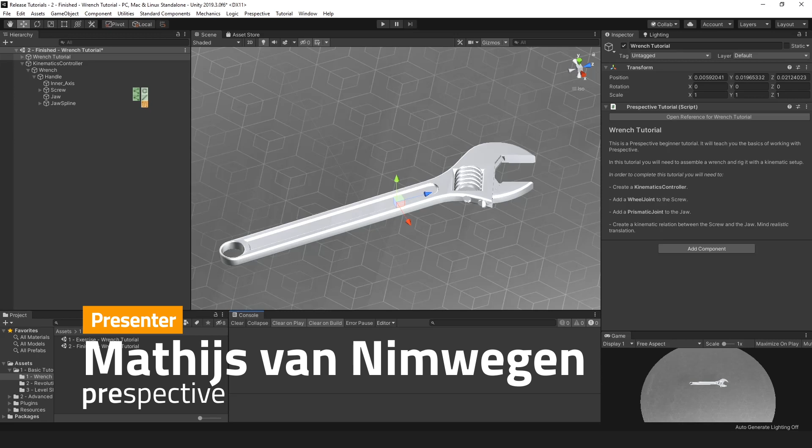I'm going to show you how to complete the wrench tutorial. So let's begin with showing you what the end result should look like. In the wrench tutorial, you need to create the kinematic setup where the wheel joint on this screw game object is connected to a prismatic joint on the jaw, so that this movement is possible where you move the jaw up and down and the screw component rotates along with it, as well as the other way around where you rotate the screw and the jaw moves up and down with it as such.

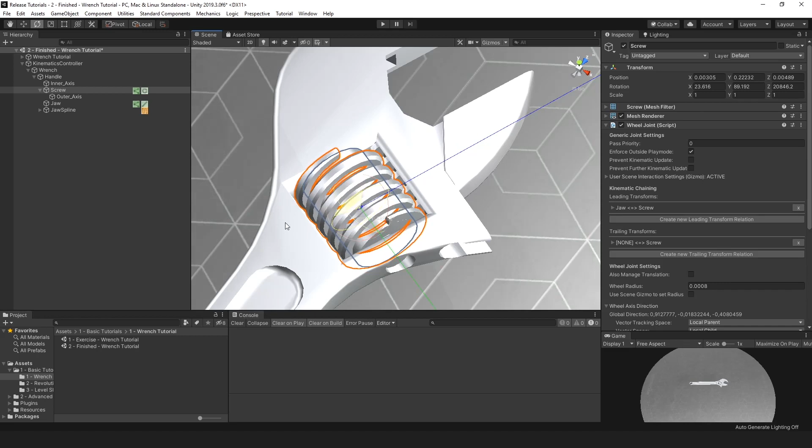Okay, so you have two scenes in the tutorial. One is the finished scene, the one we're in currently, but we're going to go over to the exercise scene, and here you will find the wrench game object but without the kinematic setup on it, and you will need to create the kinematic setup yourself. Here you will find also a detailed description on what you need to do for this tutorial.

Here you find the general description of the wrench tutorial, and it says the steps we need to take in order to complete the tutorial. The steps are: create a kinematic controller, then add a wheel joint to the screw game object, then add a prismatic joint to the jaw, and then create a kinematic relation between the screw and the jaw with the realistic translation in mind. That means make sure that these teeth don't clip through the screw, but we'll see later how that works.

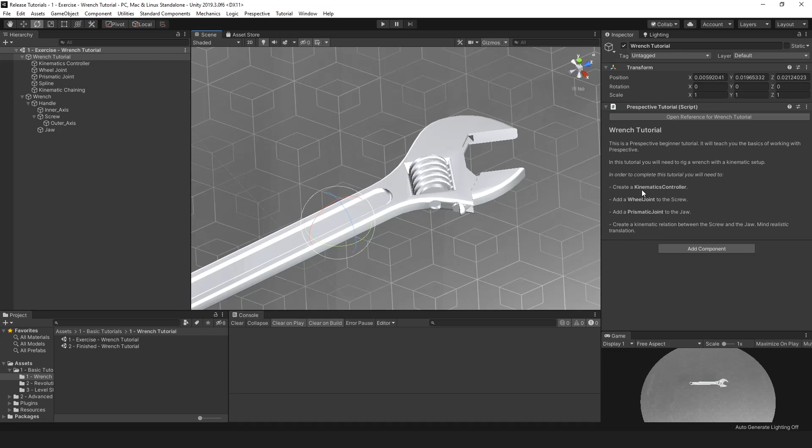Okay, so let's begin with step 1. Oh, by the way, each individual component is also explained here in more detail, how to work with wheel joints and prismatic joints and everything you need for the tutorial. So let's go ahead with step 1, create a kinematic controller.

To create a kinematic controller, make sure that you have nothing selected in the hierarchy like so, and then go to mechanics, add kinematics, and then click kinematic controller. This will add a new kinematic controller to your hierarchy. If you did select a component, then the kinematic controller component will be added onto that selected game object. We don't want that for now, so we had nothing selected.

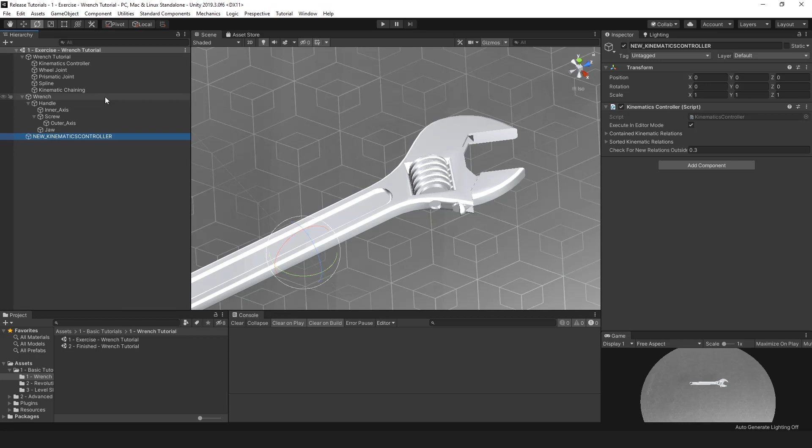The kinematic controller controls all the kinematics parented underneath it. So to make sure that everything is under the kinematic controller, we're going to parent the entire wrench on the kinematic controller as such. Okay, so that's step 1 already done. Then for the second step, add a wheel joint to the screw.

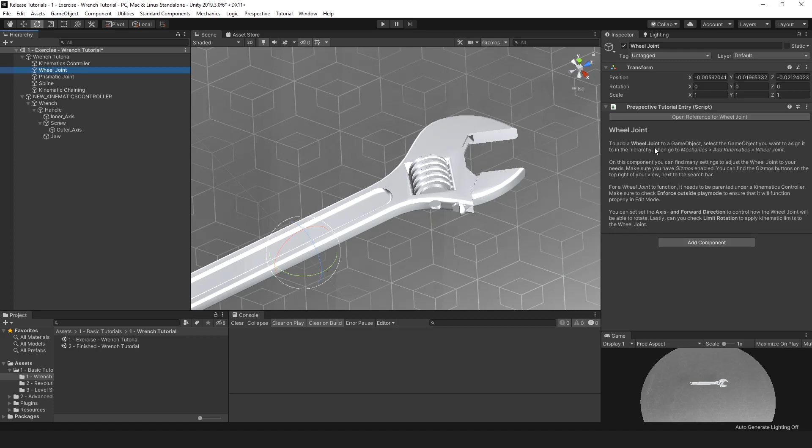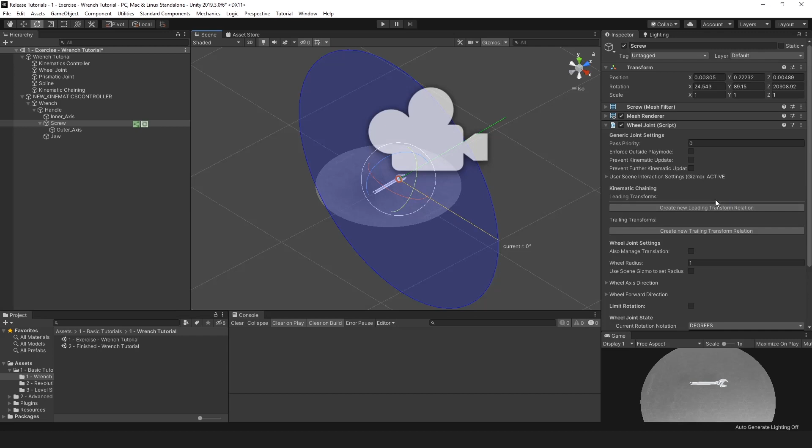We're going to select the screw this time, and if we go to the explanation about the wheel joint here, you can see to add one, go to mechanics, add kinematics and wheel joint. So we select the screw, mechanics, add kinematics and then wheel joint, and this will add our wheel joint component onto the screw game object. This will draw this seemingly huge gizmo. This wheel joint is by default generated with a radius of 1, but we're going to bring it back to 0.02 for now, so that we can see it more clearly.

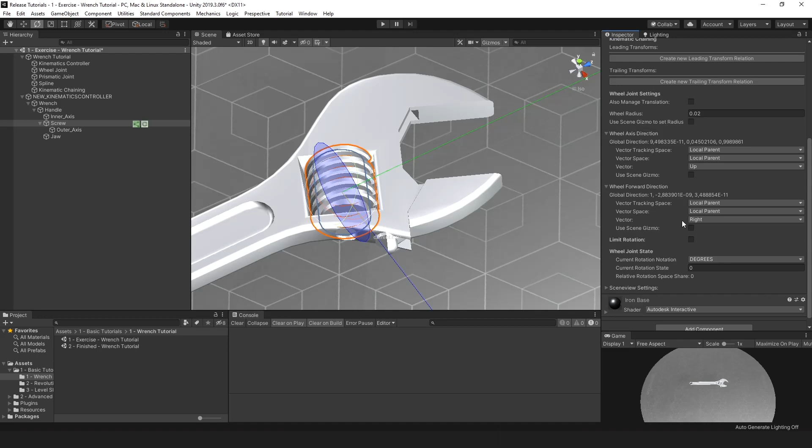Then what we need to do also is set up the axis and the forward direction for this wheel joint. This blue circle indicates the plane over which the game object is allowed to rotate, and as you can see, it currently is not aligned with the actual axis that this screw would rotate over. So we need to set the axis and the forward direction. To do so, in the wheel joint settings, you go to wheel axis direction and wheel forward direction, and you can find these scene vectors, which allow you to set the axis and the forward direction.

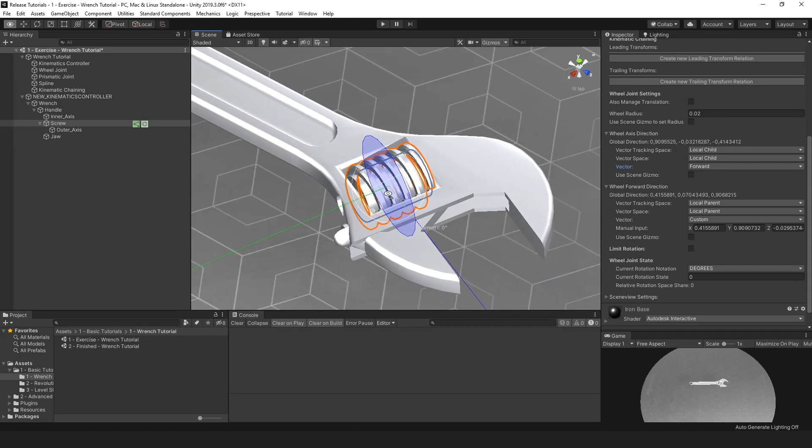So let's begin with the axis direction. It's currently set to the vector space local parent, which means that it will track the vector space of its parent, which is the handle. But since it's not properly aligned with the handle but under an angle, we're going to change this to local child, which means that it will look at directions relative to itself. Then we need to change the axis direction, and we're going to set this to forward. As you can see, the plane now shifts and immediately changes into the right plane.

So this custom vector is actually right, I believe. Yeah, as you can see. So it just changed. That's because it's the same. Go to left and then right. No, it doesn't want to. But anyway, it's in the proper position.

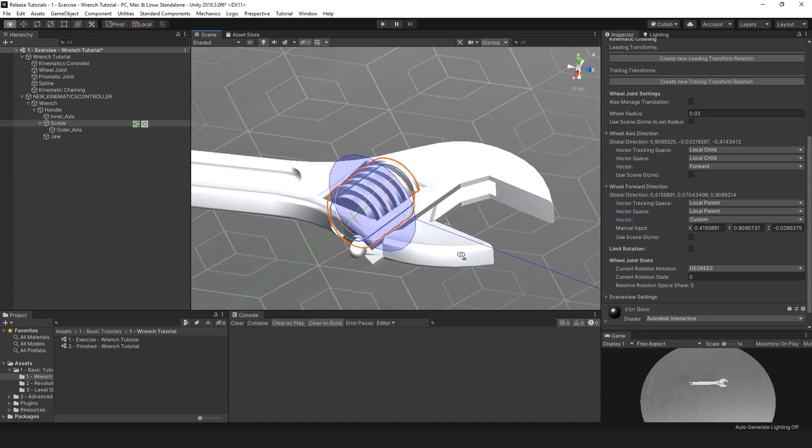And the plane is now set up. But if we try to rotate this over this axis, it still allows this movement. And that's because the wheel joint currently isn't enforced, because we are in edit mode. If we go to play mode, then this will work.

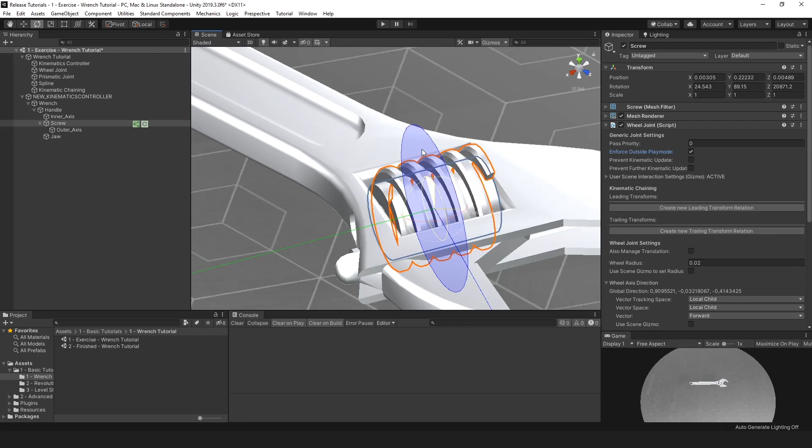What we can also do is check this box and enable enforce outside play mode. And we can see that this now is allowed to rotate over this axis, but no longer is allowed to move over this axis. And it's now constrained on the green axis you see here. And that's currently everything there is to setting up the wheel joint, and that is step 2 completed.

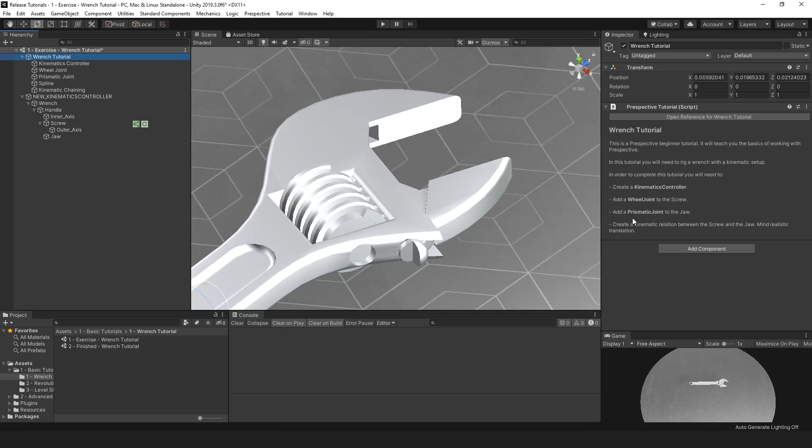The next step is adding a prismatic joint to the jaw, and the jaw should only be allowed to move up and down like this, because that's the only movement this slot would allow for. But we can of course move like this also at this current moment.

To add a prismatic joint to the jaw, we need to go to Mechanics, Add Kinematics and Prismatic Joint. This time I'm not going to use the menus up here, but we're going to use the context menu. If you right mouse button click this, then all the way at the bottom you find Add Kinematics, and then you can add the same kinematics as well. We'll add the prismatic joint to the jaw game object.

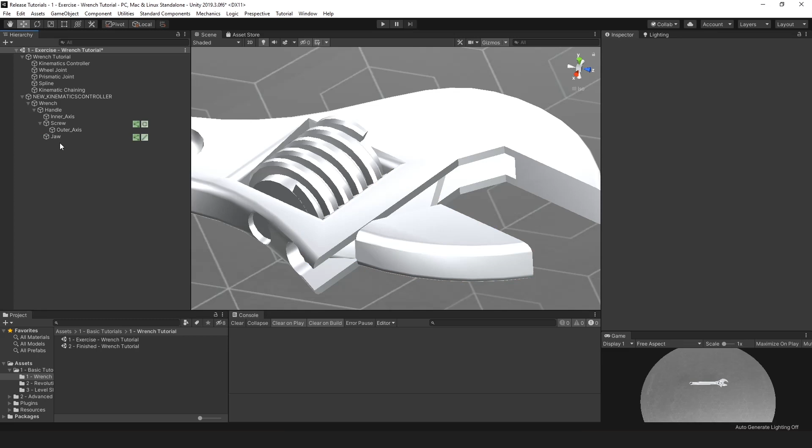A prismatic joint needs a spline to describe the path it's allowed to follow, which will constrain it to that spline. And to create a new spline, make sure nothing is selected, and then go to Utilities, Create, and then Spline. This will add a new spline to our scene. If we zoom out, we see that a spline is by default generated with 2 points, and these points are 0, 0, 0 and 1, 0, 0 in the global space.

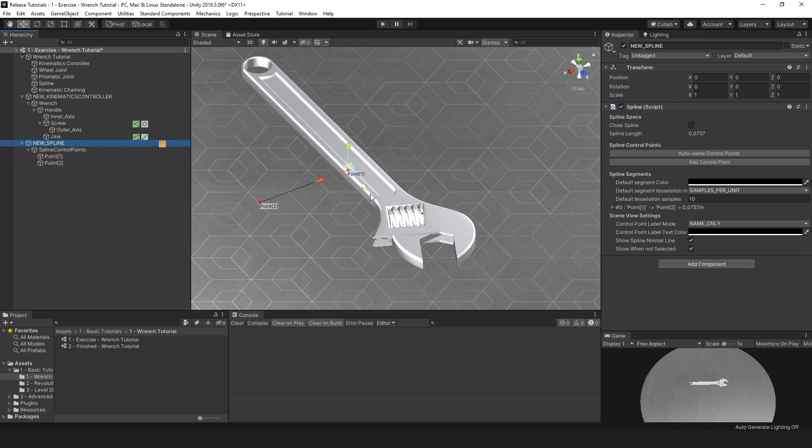If I select point 2, I'm going to bring this in already, so that it's matching this slot length more precisely already. And I'm going to move this over here so that it's closer to our wrench.

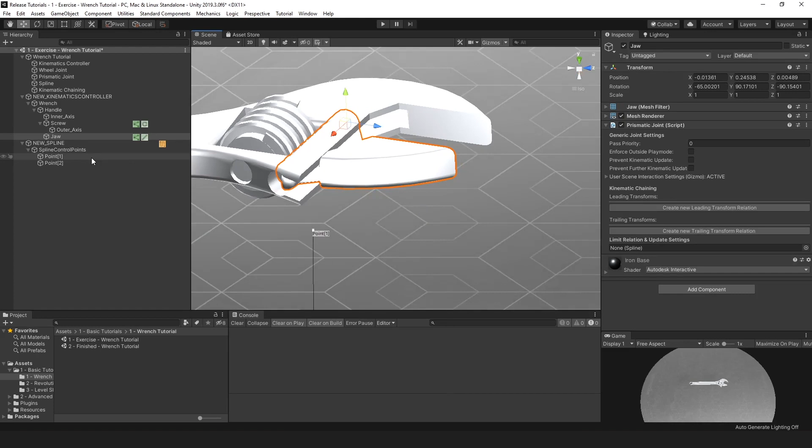We need to position our spline so that it describes the constrainment of the slot where the jaw is currently in. I'm going to disable this jaw so that we can't see it, and then I'm going to change our shading mode to shaded wireframe. This allows us to see the vertices on the mesh, and that also allows us to position these points precisely on the vertices.

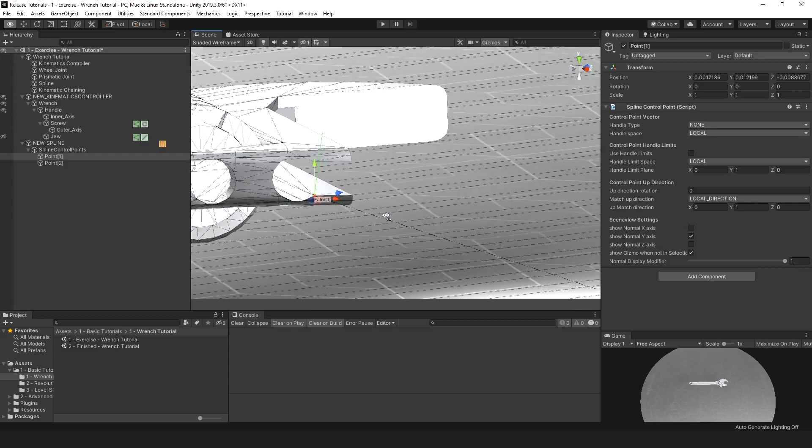If I now select point 1 and I want to move this onto a vertex on the mesh, I hold V and I'm going to drag it, and it automatically snaps to that vertex. We want to align this spline with this slot, and I'm going to have it aligned with this line on the mesh, because that perfectly describes the slot.

So I'm going to zoom out a little bit, and then point 2 is visible, and this vertex here also. Select point 2, hold V. If it doesn't, click first and then hold V. Okay, and then drag it onto that vertex like that. And if I rotate my camera, I can now see that it actually is positioned properly. Okay, great. I'm going to enable the jaw again.

Then this spline, I'm going to parent it under the same parent as the jaw. So this jaw is currently parented under the handle. So that means I'm going to parent this under the handle as well. I'm going to place it right above the jaw. Yes, like that. And I'm going to rename this jaw spline for now.

Okay. Then if we go back to the jaw, we still need to assign the spline to the prismatic joint. As you can see here, there's currently no spline selected. If I drag this jaw spline in, this spline is now assigned to this prismatic joint.

Again, it's still allowed to move everywhere it wants, because we haven't enforced it outside play mode. So if I click this now, you can see it's now constrained to the spline. We can move over this direction, but not anymore in this direction, nor in this direction. Okay, great.

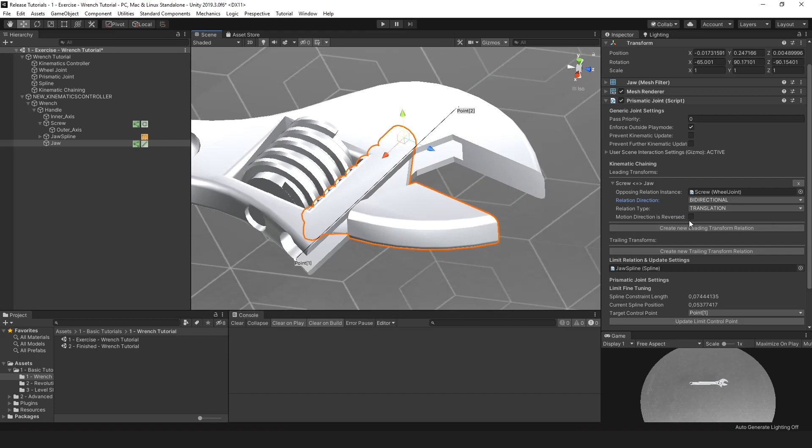And we may have to set this to reversed, and we're going to check that now, because if we move the jaw up and down, we now see that the screw moves in the opposite direction. The jaw moves down and the screw moves up. So we need to set motion direction to reversed, so that if this moves down, the screw also moves down. So the relation is now made, but as you can see, the proportions aren't right, because the jaw moves down faster than the screw.

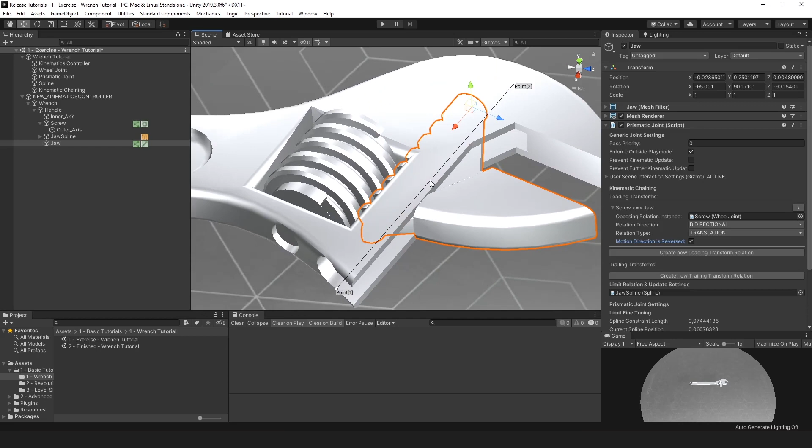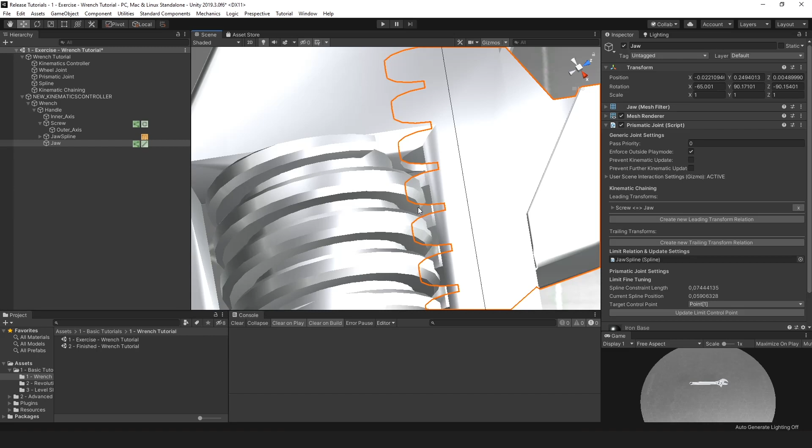To have these align, we need to change the circumference of the wheel joint, because the circumference of the wheel joint is directly related to the distance traveled over the spline. The distance between these teeth, from this tooth to that point on that tooth, should be equal to the circumference of the wheel joint. And if you calculate the circumference, then the radius should be 0.0008 for this setup. If I now move this jaw, we should see that the screw moves along with it at the same rate, as you can see here.

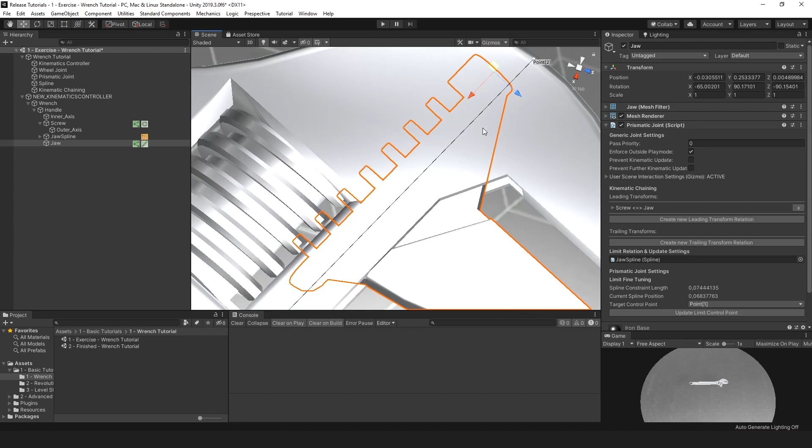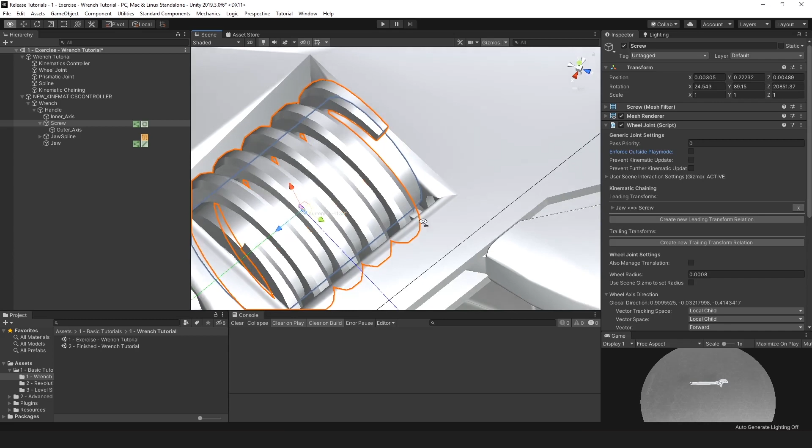But it still clips through. So I'm going to close the jaw completely, and then we want to reposition this so that it doesn't clip anymore. I'm going to select the screw again, and disable enforce outside play mode, because this will allow me to rotate the wheel joint without the prismatic joint moving along with it. I'm going to rotate it so that this coil now aligns with the teeth, like this. Okay. I'm gonna re-enable enforce outside play mode, and if I now move the jaw down, we should see that these are properly aligned. Yes.

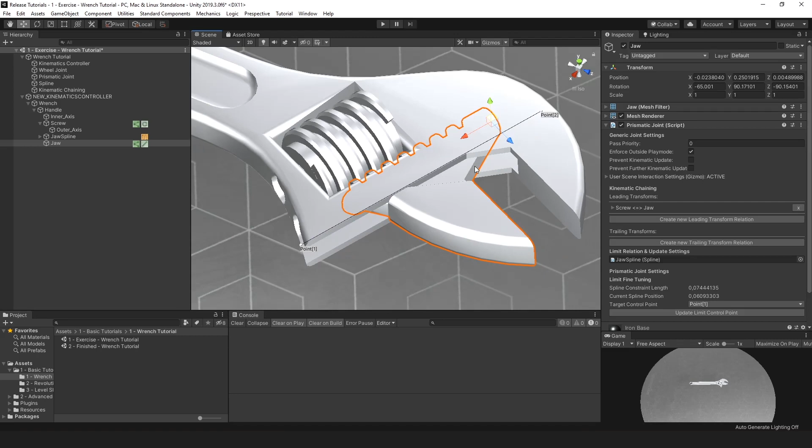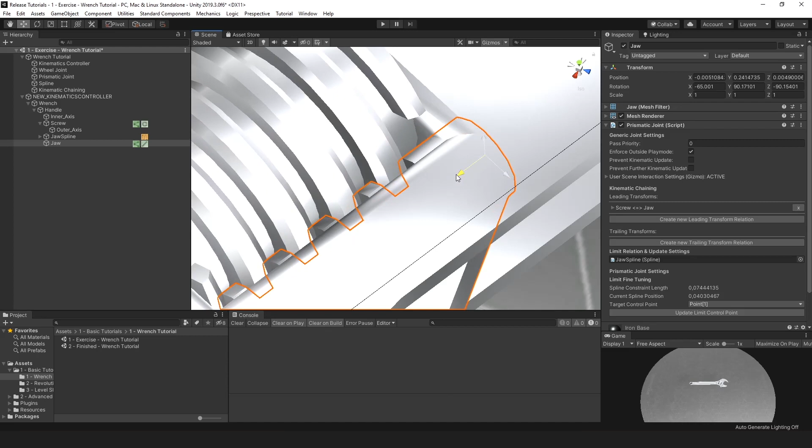Okay, so we have the relation set up, and the proportions are right. Then there's only one thing left we need to do, because if we move the joint down, this should be a hard limit, because this is a point where the screw would be jamming against the jaw. So we need to make sure that the prismatic joint wouldn't be allowed to move further than this. Currently we can still move a long way down.

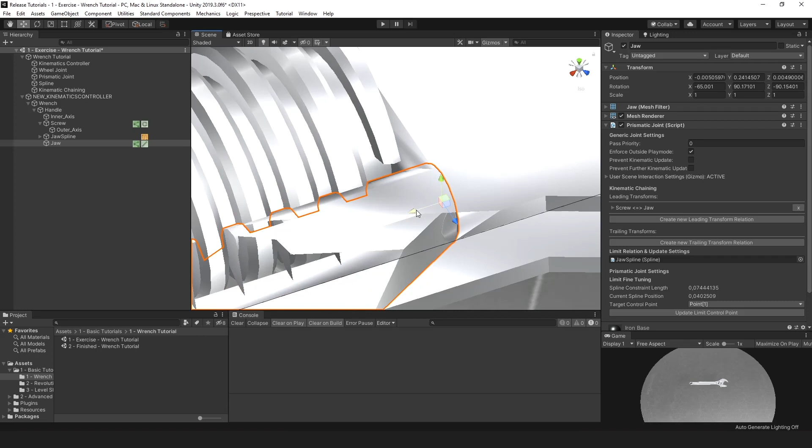So we're going to position this on its limit point, approximately this, and then go to our prismatic joint, scroll down, and find the spline settings here. This point 1 should be the very limit of our allowed movement. So we want to reposition this to our current position, since we are now actually at our lower limit. Select point 1 and then click update limit control point, and it now repositions point 1 to here. So now we can no longer move beyond this point.

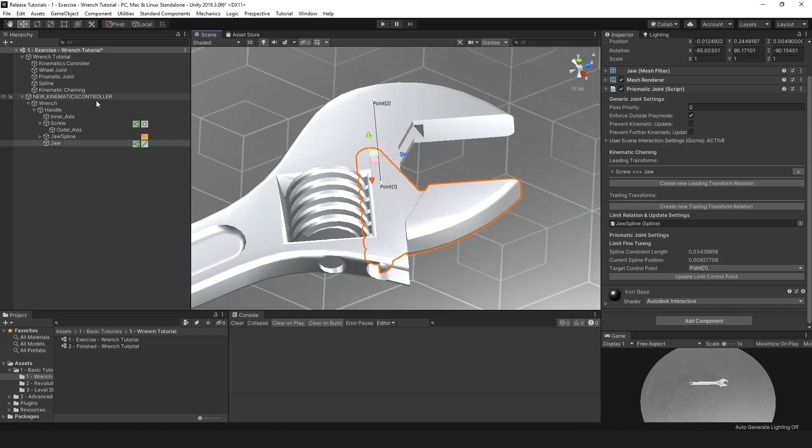With that completed, we now have a fully working wrench. So we have created the Kinematics Controller. It controls the wheel joint and the prismatic joint and their relation. We have a fully working wheel joint, a fully working prismatic joint with a realistic relation between them. And that concludes our wrench tutorial.